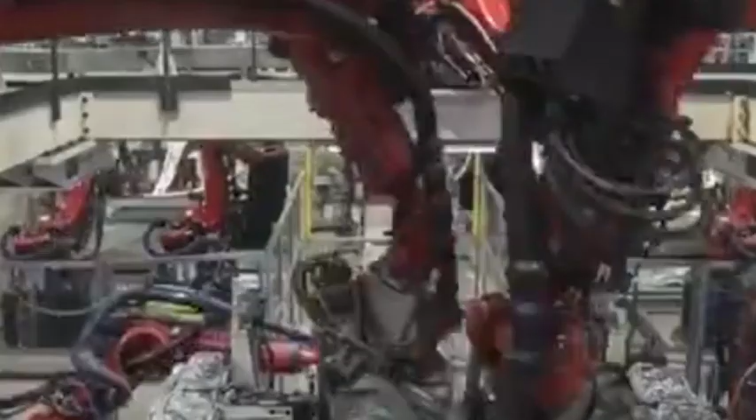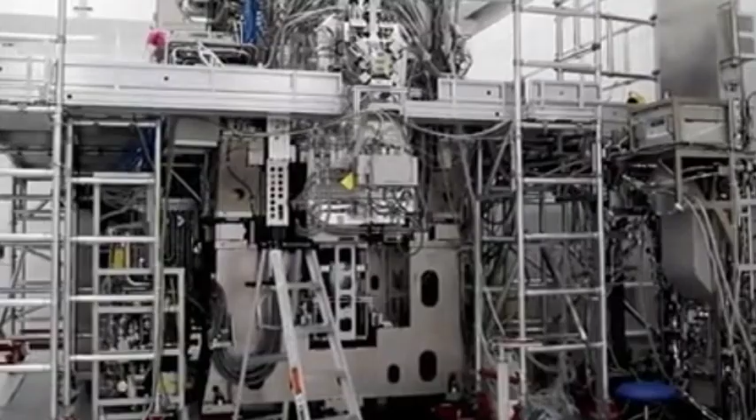If you always watch our channel, you may know the news of the US ban on the Chinese semiconductor industry. Due to the US chip rules, China is struggling in the high-end chip industry. It is precisely because of this that domestic chip manufacturers focus on the mature technology market.

Design software. But what the United States did not expect was that China's domestic EDA manufacturers not only made major breakthroughs, but also successfully got rid of their dependence on American technology. So what is going on? Let's find out next.

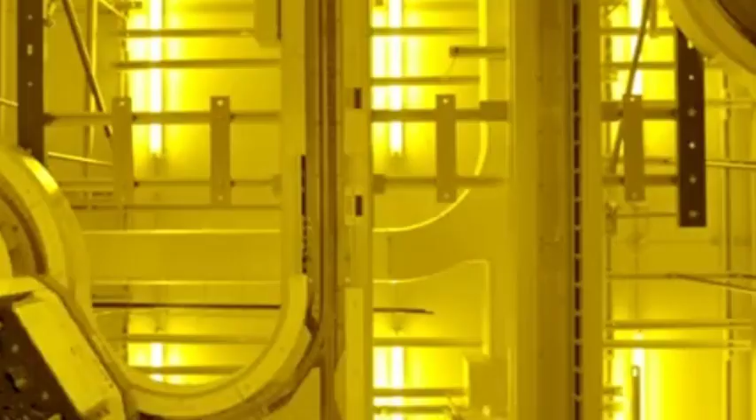This matter has to be talked about after the chip bill. Since the introduction of the chip bill by the United States, domestic chip manufacturers such as SMIC and Huawei can no longer purchase high-end EUV lithography machines. It can be said that without EUV lithography equipment, it is impossible to produce advanced process chip products, at least with the current technical strength.

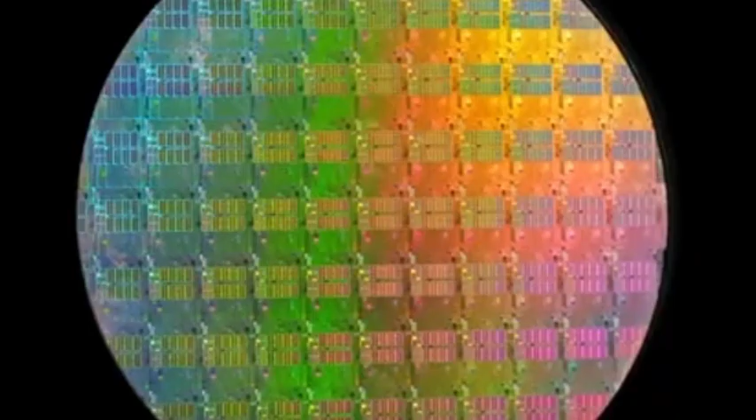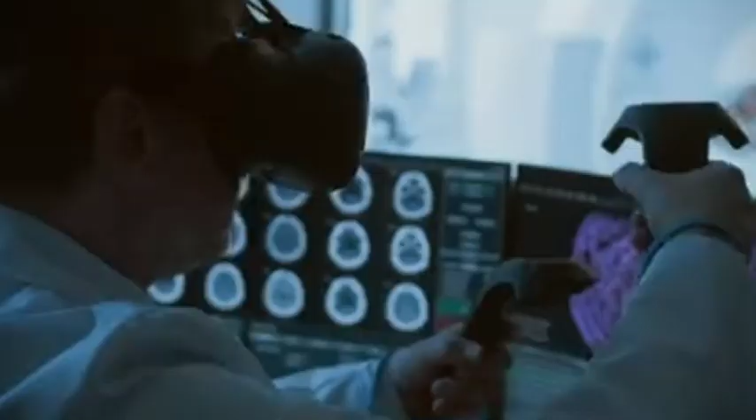So domestic experts say that China does not need to research advanced processes. China only needs to occupy more market share with mature technology, and China's chip industry can also successfully rise. As soon as this remark came out, it immediately aroused the attention and discussion of the Chinese people. Some people also found that this is what domestic chip manufacturers are currently doing.

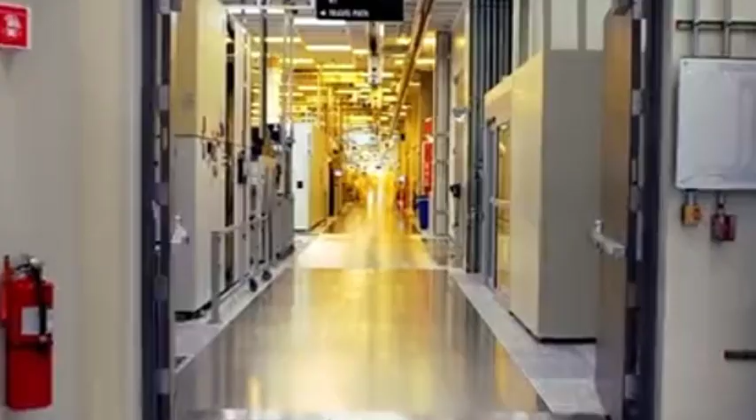For example, SMIC has established 4 fabs in China to comprehensively expand chip production capacity. The chips are all 28 nanometer process chips. Indeed, the United States formulates chip rules mainly to prevent China from entering the high-end market. On the one hand, it is afraid that American high-end companies will lose their competitive advantage.

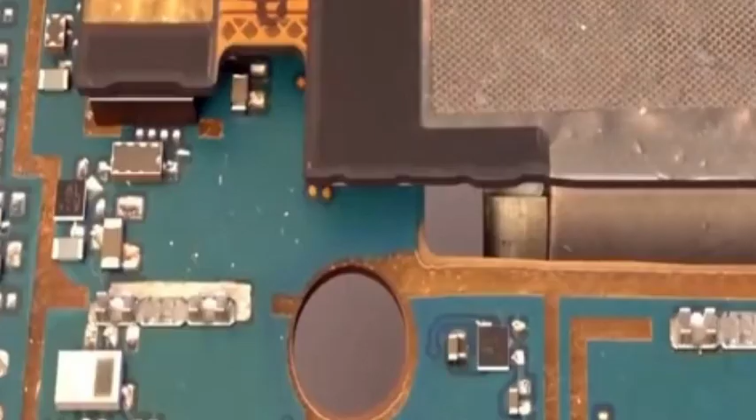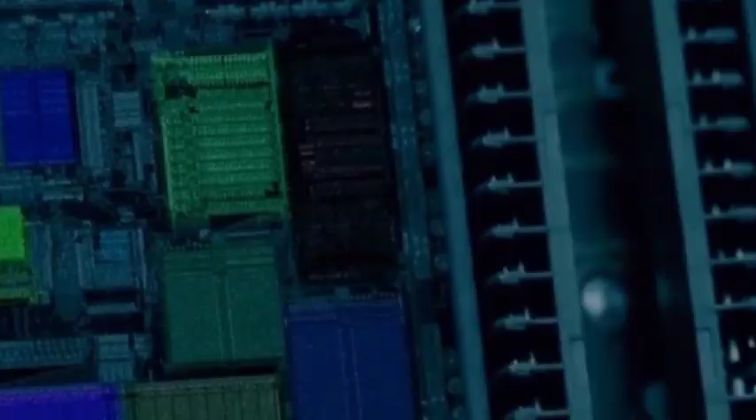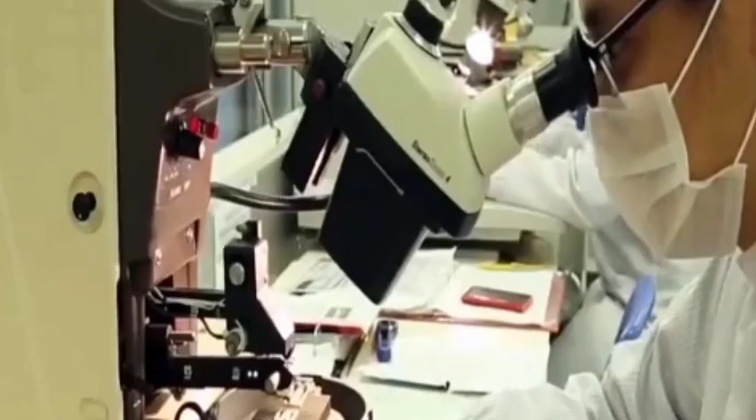The US chip ban has delayed China's entry into the high-end chip market for the time being, so China immediately adjusted its strategic layout, not only to develop more advanced lithography equipment and products that can replace EUV lithography equipment, but also to occupy a place in the low-end chip market. Only in this way can China have a certain voice in the entire chip industry.

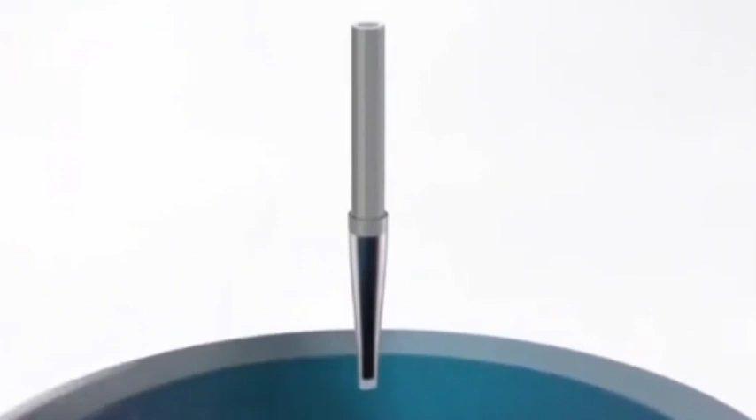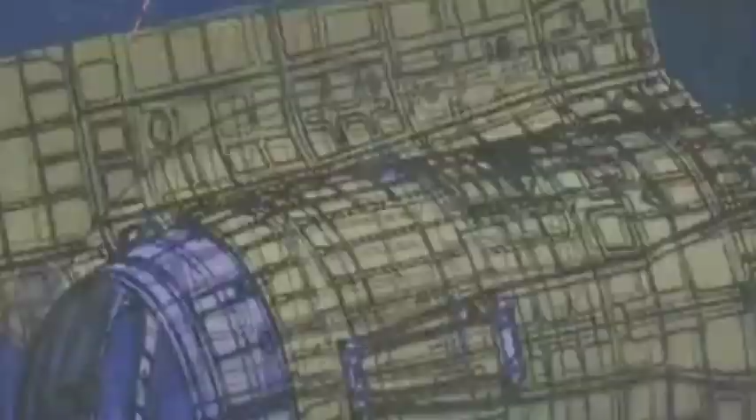Unexpectedly, the United States saw China's intentions and further expanded the scope of sanctions. For example, US companies are not allowed to sell 14 nanometer process lithography equipment, and US EDA giants are not allowed to provide chip technology support for Chinese companies, especially in chip design, a field where China is stuck, and the supply of EDA industrial design software involving advanced semiconductors is cut off.

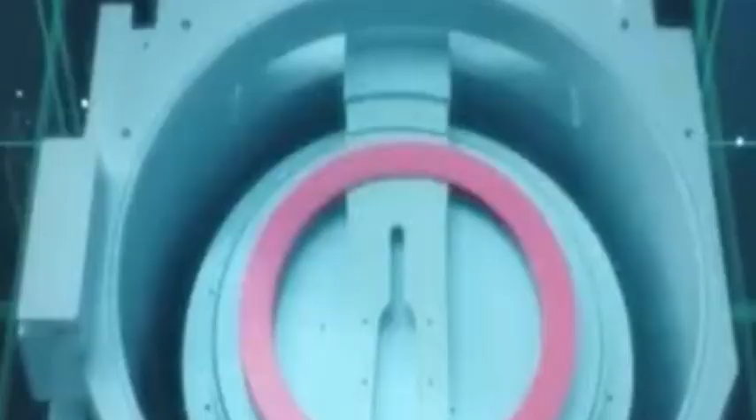On the surface, the United States is still targeting China's advanced industries, but in fact, cutting off the supply of EDA means that domestic chip manufacturers cannot even design mature technology chips. For example, 28 nanometer process chips need the support of EDA design software. The order to cut off the supply is to further prevent China from successfully occupying the low-end market.

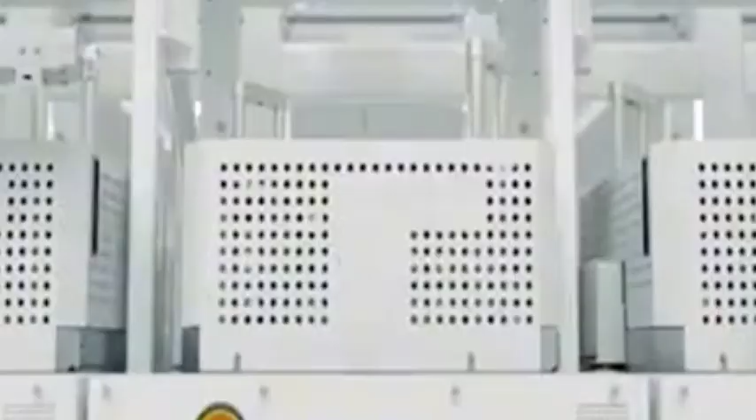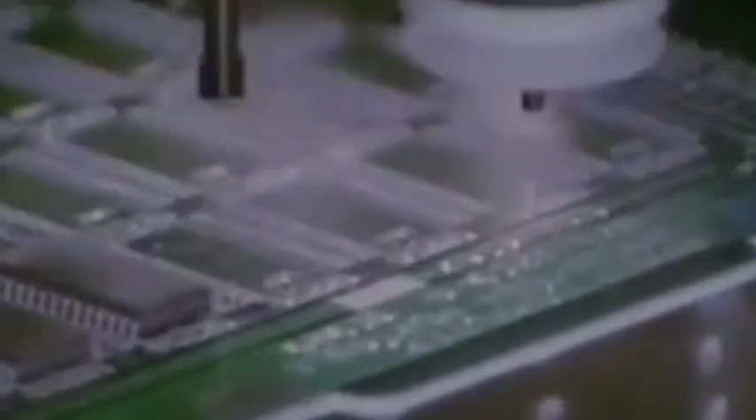That is to say, there is no distinction between high-end and low-end industries. The United States wants to further restrict China's development so that they can continue to maintain their leading position. Although it has a certain impact on Chinese chip manufacturers for the time being, China can also see that the more anxious the United States is, the more it proves that China's choice is not wrong.

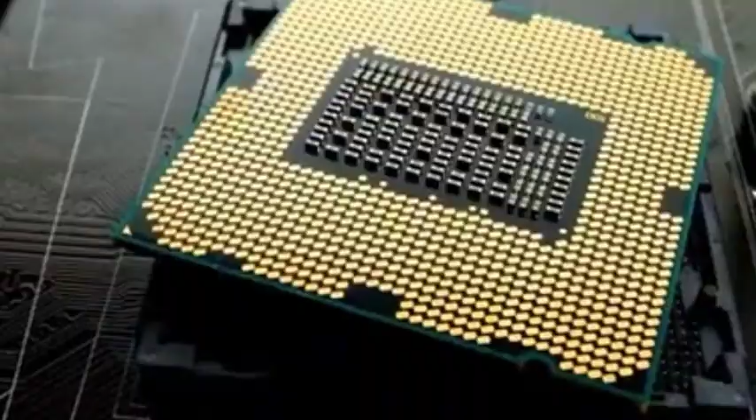By directly breaking through the core technology and breaking the U.S. technology blockade and monopoly, China can successfully break through the siege and rise in the chip field, otherwise the United States would not do things so absolutely. Now that we know the direction of development, how do domestic chip manufacturers do it? Domestic EDA manufacturers have made major breakthroughs. What does it mean for China's chip industry?

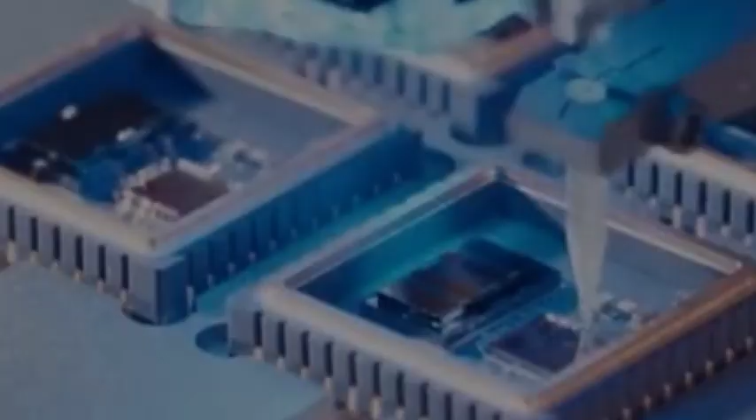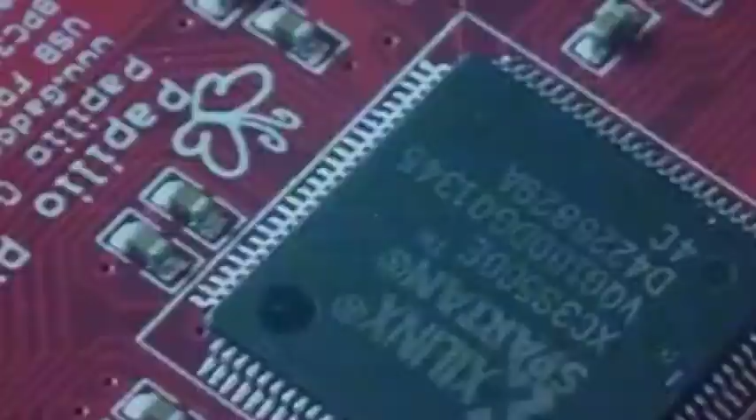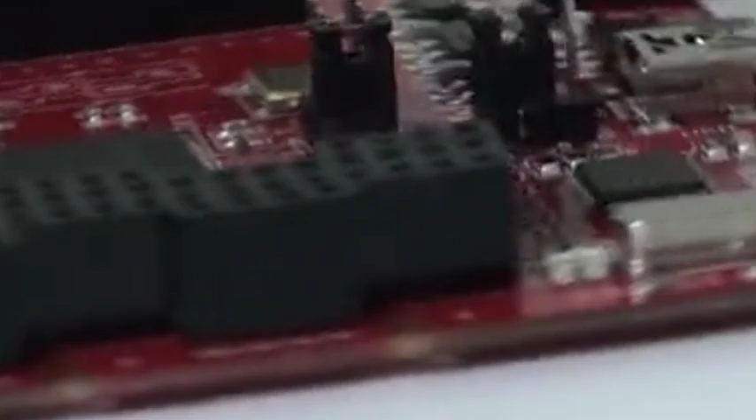Not long after the EDA supply was cut off by the United States, China achieved a major breakthrough in the EDA field. Empyrean officially announced that the company's EDA products can fully support the design requirements of 28 nanometer and mature process chips. In addition, Empyrean acquired 100% equity of Xindao Technology. The company is mainly engaged in the development of memory IP characterization extraction tools, one of the most critical tools in digital design and wafer manufacturing.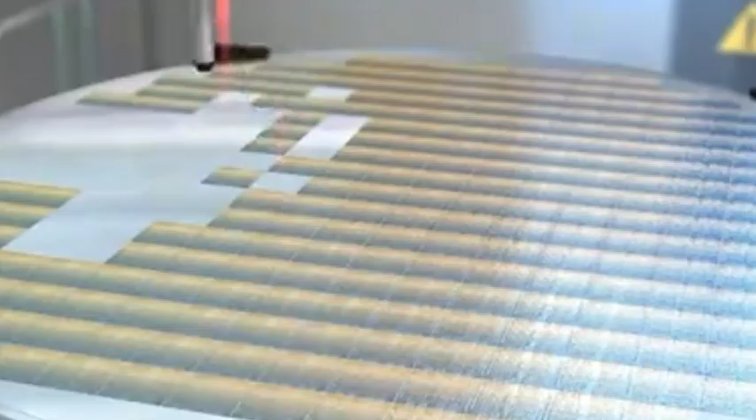This acquisition also means that Empyrean has mastered more technical advantages in the EDA field, especially the successful development of EDA software that supports mature process design, and it also means that the US ban on EDA supply has been completely reduced to a joke.

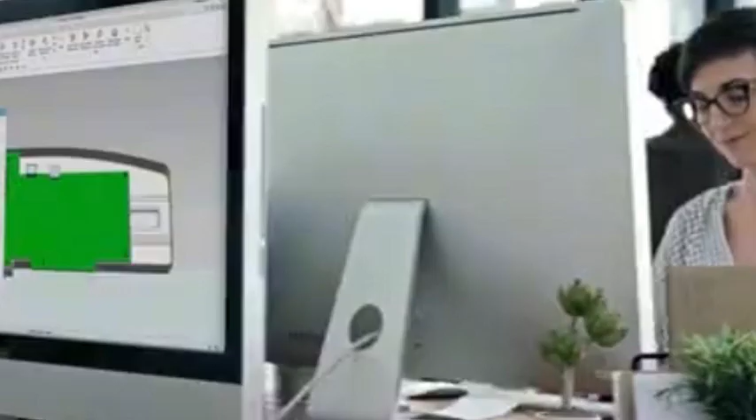As mentioned above, due to the high-end chip rules, China cannot break the blockade in a short time, but in the mature technology market, although the United States further cut off the supply of EDA, domestic EDA manufacturers have made major breakthroughs. This means that China has completely got rid of its dependence on American technology in the mature technology market. From then on, domestic chip manufacturers will occupy more global market share in the mature technology market.

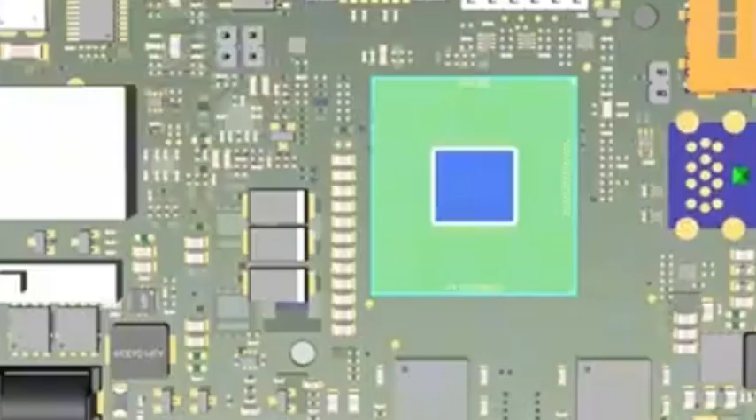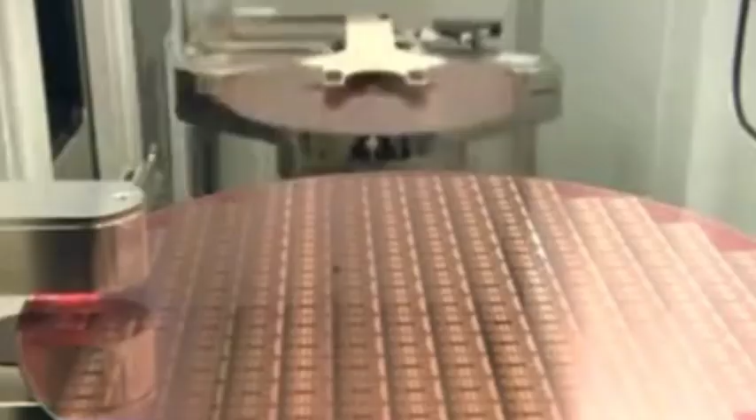At present, not only SMIC is focusing on mature technology, but even TSMC has discovered a huge market for it. According to authoritative statistics, since 2019, the number of chip manufacturing projects planned globally has reached 86, with China accounting for 31, and the United States only 12. Industry experts believe that as long as these projects are completed, China will have 40% of the world's mature process production capacity.

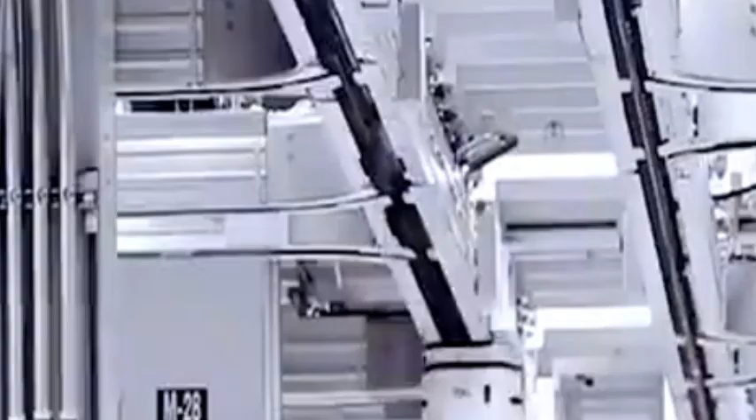Indeed, the mature process market is widely used. Whether it is automobiles, electrical appliances, electronics, or military industries, chips with mature process technologies are required. According to IHS forecasts, the global mature process foundry market will increase to 43.1 billion dollars in 2025, accounting for 76% of the market share of the entire chip industry, coupled with the fact that high-end chip manufacturing progress has been weak.

It is even more difficult to develop advanced manufacturing processes below 1 nanometer. It can be said that whoever masters the mature technology market in the future masters the initiative and the right to speak in the global chip market. Technology blockade and monopoly are no problem, so in the end, I believe that China's chip industry is bound to rise eventually. What do you think about this?